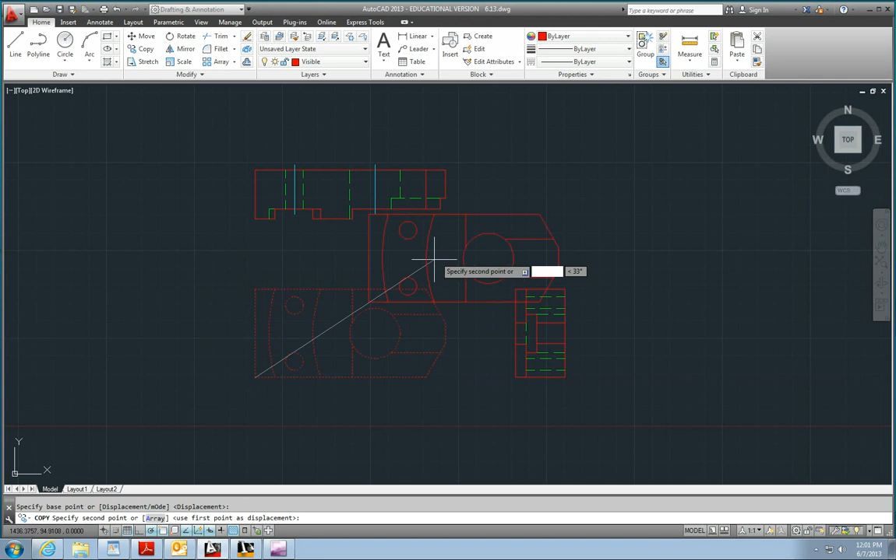So the way you do the cabinet sketches, you want to start off at the very front edge of the object, which would be these surfaces right here. So what I'll do is I will just copy the front view and place it right here. And then I'm going to trim away different things that I don't need. Basically, I want to get rid of everything that's not on the very front edge, because that's what we want to focus on. So these items are the only ones that are actually on the front edge. It's this and this.

So now, as I said, we want to do a cabinet oblique sketch, so our receding lines need to be half the distance of true scale. So let me check the depth of that line here. I'll use the properties palette for that. And that length is 6. So let me draw a line at a 45-degree angle. You'll want to make sure that you have your polar snap turned on at an appropriate setting for this. I always like to keep my increment angle on 15 unless there's a reason not to.

So from here, I want to draw a line that's 3, again in the 45-degree direction. And from here as well. Here, and then from here. Now you can see that we also need to do from this area right here.

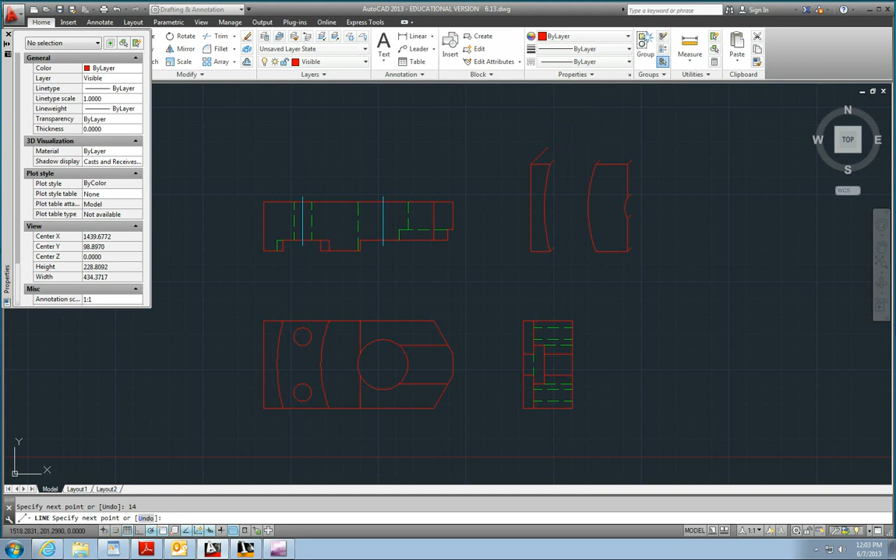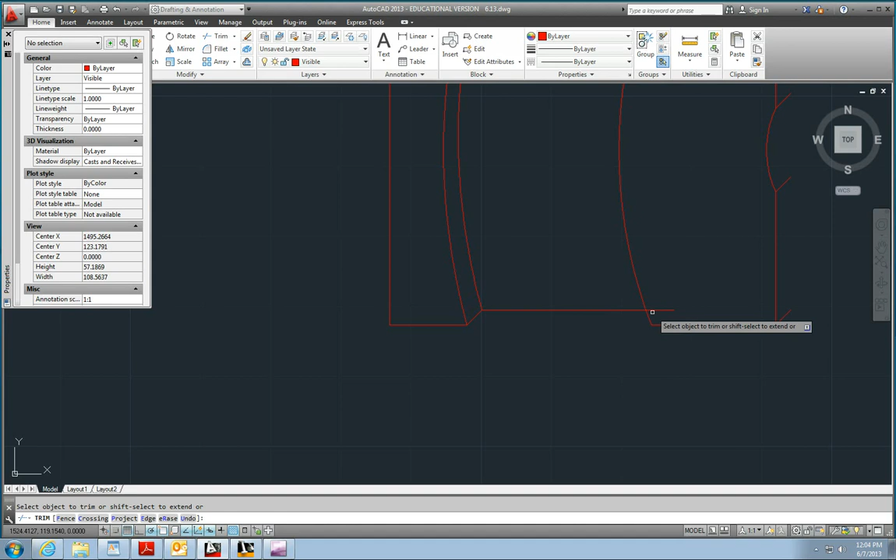Okay, so I think what I want to do now is to draw a line from here to here, and then copy this arc. So I'll do CP enter, then select that arc, enter, and then I will copy from endpoint to endpoint. Make sure you have your snaps turned on, and then I will draw a line directly to the right. I'll draw it beyond this arc and then trim off what I don't need to make sure that my line stays at the correct orientation.

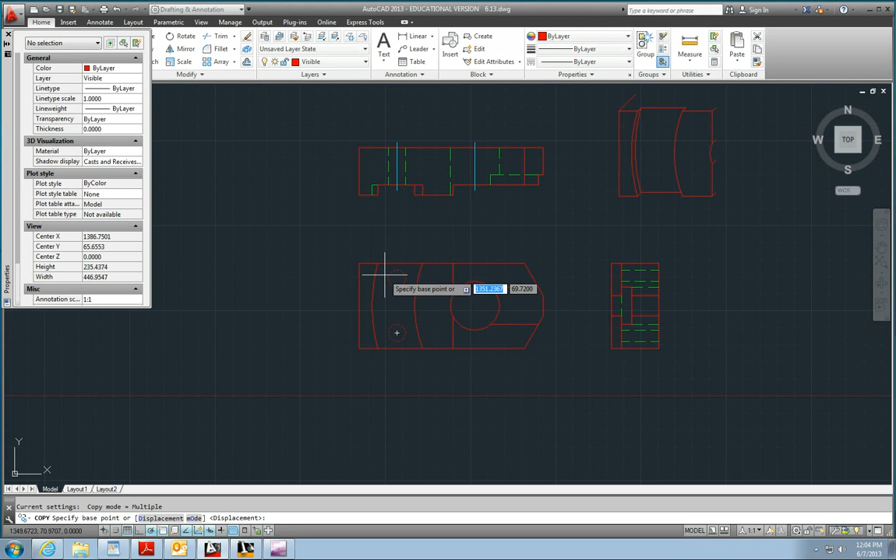Okay, and let me go in and add these circles. I want to just copy those circles, CP enter, and then from the endpoint of this arc, I want to snap to the endpoint of that arc. So we'll place those circles in the correct position. Alright, so I think I can draw a line from here to here at this point.

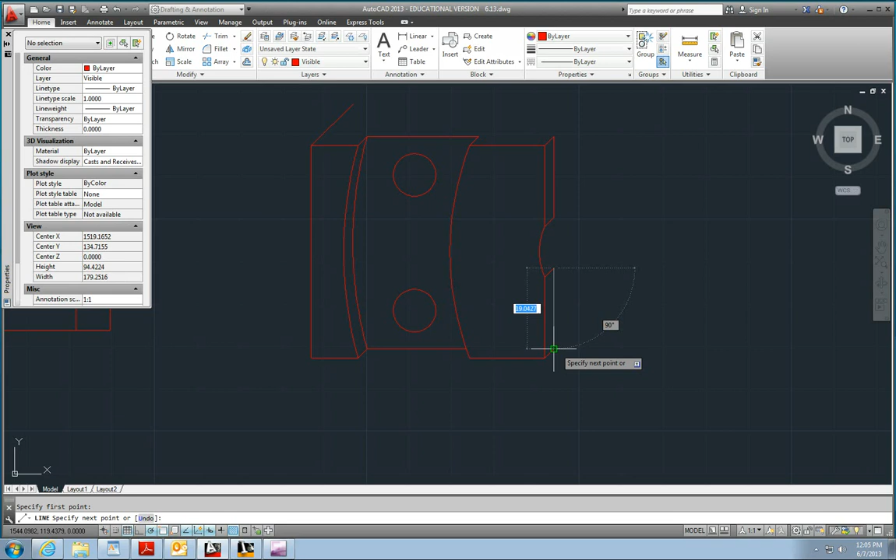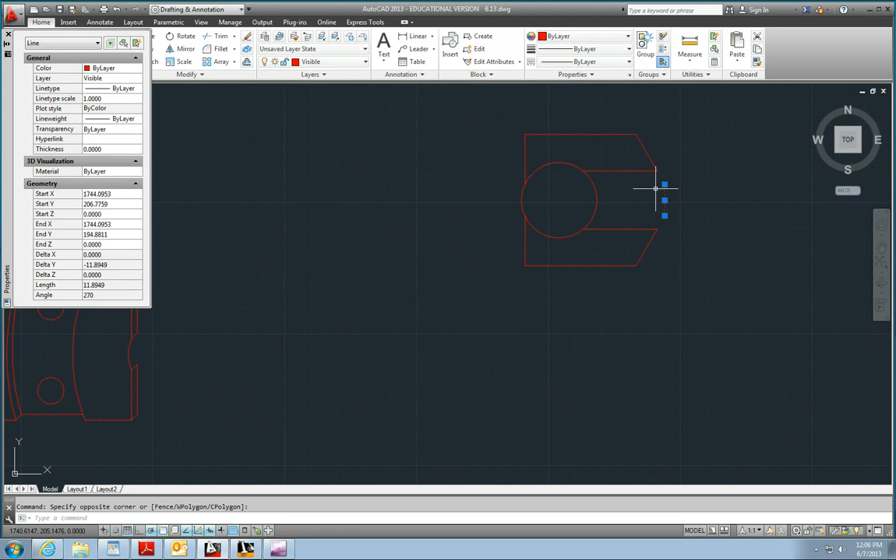Okay, so now we have worked down to our next elevation, which is this surface. And again, I just want to copy the front view and then trim away everything that's not on that surface. I'm going to include this area here. Let me erase that. You have to be careful where you're trimming, or you'll get the wrong thing. So we should see that whole circle, I believe. And just so we don't have to overlay lines on top of one another, we'll get rid of that. Now let's move that into position. Okay, that looks good.

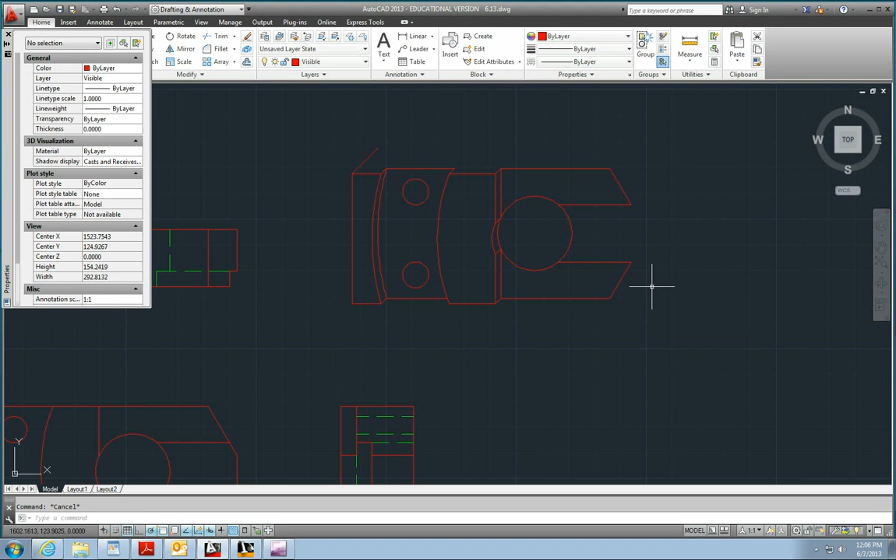Alright, so moving right along. From this point, we need to draw a line, the distance basically from here to here. So let's take a measurement. DI, enter. Let me measure from this point to this point. Oops, I missed the distance. Let me scroll up. That is 97. Now this is not a receding line. We're going to draw this from left to right, so this goes whatever distance it should be.

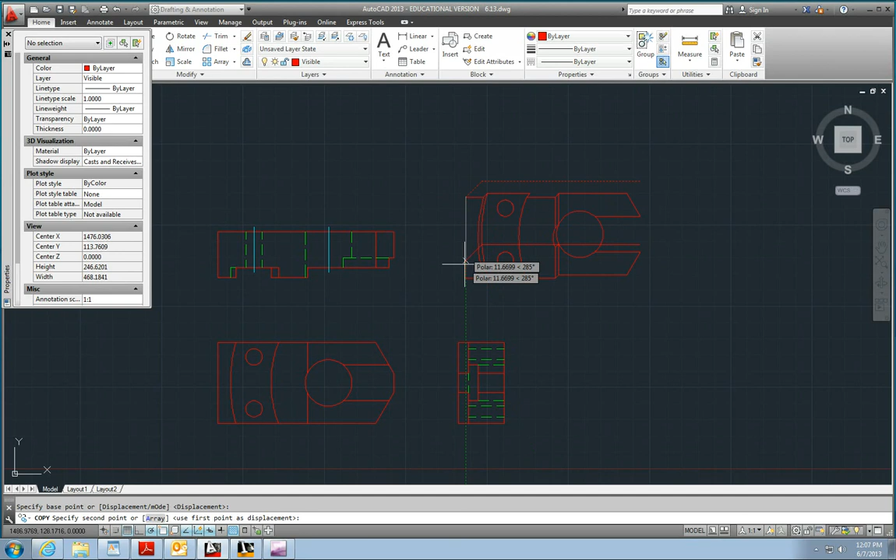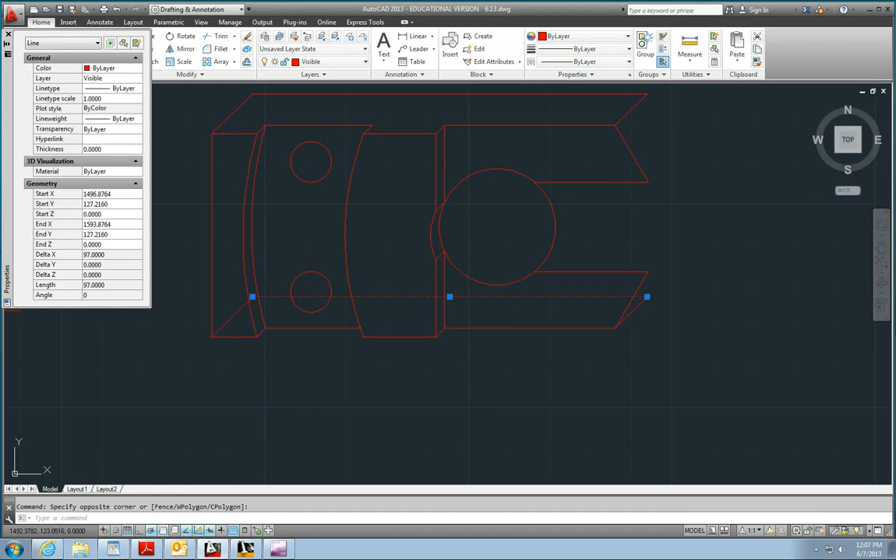And from that point, where should we go from here? I think we're actually going to have to do some trimming here. I'm thinking it would be easier if I copy these two lines here. I'm just using this to locate a point, which is right here. All right, so I can tell that a line goes from here to here, and from here to here. So now I can erase those two lines. So I'm going to go ahead and finish up this first video, and we will pick up and hopefully finish in video 2.